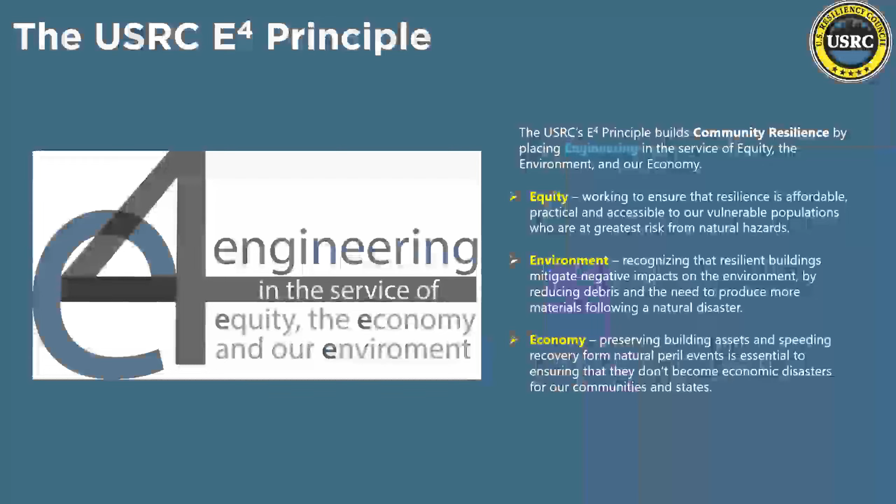Earthquakes have a big impact on society, the economy, and the environment. The Christchurch earthquake, which was 10 years ago, is nevertheless a fairly recent example of just how dramatic those impacts can be. There was a big earthquake in Christchurch, New Zealand at the end of 2010 and beginning of 2011. There were two of them.

The good news is only 2 buildings in the downtown area collapsed, but more than half of them were ultimately demolished because they were damaged. That raised a lot of questions about whether, from a code perspective, only having 2 buildings collapse in what was the big one for them was a very positive thing. But from the perspective of all the owners that lost their buildings, or tenants, or workers that lost their jobs and housing, obviously it was a disaster.

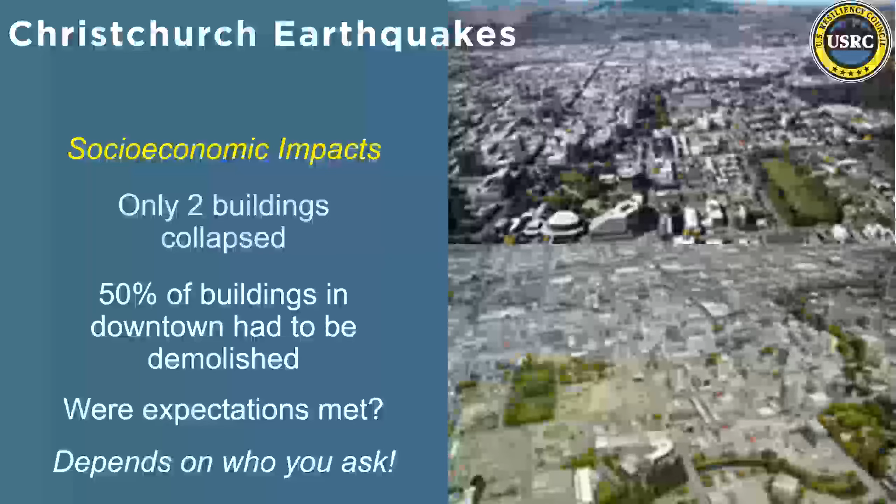Part of the formation of the USRC was to better align the expectations of the population with the design that engineers and architects perform. But it also had a really huge environmental impact.

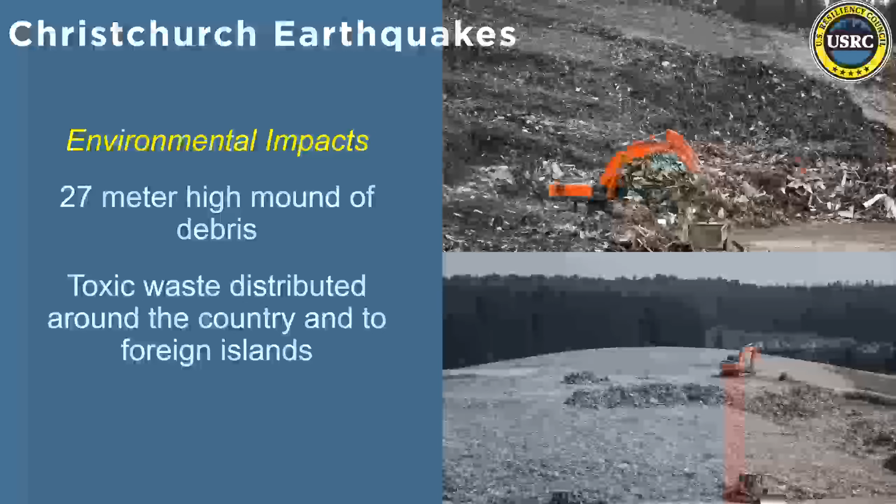We think about deconstruction of buildings at the end of their lifetime, but when you have a big earthquake like this, you don't have that luxury. The buildings get demolished and hauled off to landfills. There was a 27-meter tall mound of debris generated from this earthquake, and that doesn't even include all the stuff hauled off to other islands. A lot of this includes toxic chemicals, asbestos, lead, that they just didn't have time to take out. So building resiliently is also building in an environmentally conscientious way, because you don't have to replace the buildings as often.

Equity, the economy, and our environment. I'm going to save the environment for last because that's going to kind of go into what Brandon's going to be talking about. But when it comes to equity, the idea behind building ratings is that you can look at a whole community.

You can look at a whole community and how different buildings, different services like housing and food, are going to perform in an earthquake. You can measure that using a rating system like ours. But then you can start into urban planning and start deciding, okay, should we have requirements to retrofit older buildings? If we replace buildings over time, should they be replaced, once we have the opportunity, with higher performing buildings?

From a community perspective, I know the architectural profession has always had a really strong interest beyond just the bounds of the building itself. They've really tried to look beyond to what kind of impacts their designs are having on neighborhoods and communities. From the perspective of the U.S. Resiliency Council, we see this as an opportunity for design professionals when working with building owners or jurisdictions to say, hey, if we went a little bit further and designed these buildings not just to be safe like the current code requires, but also to be functional after an earthquake—if it's a grocery store or housing—how much better would that be for the community?

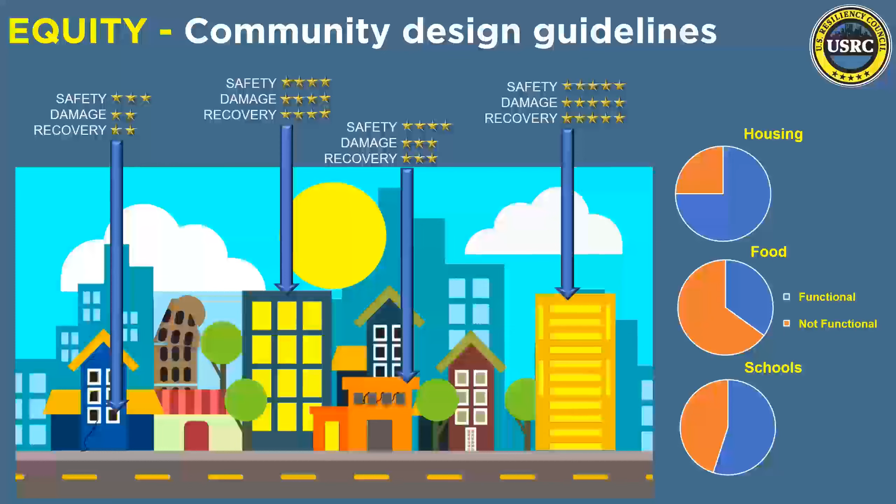So we believe that can really target especially areas that are disadvantaged or socially vulnerable. When it comes to the economy, you all know from professional experience that with the advent of the LEED system and other green rating systems, building owners have something that's more desirable. They can charge more money, it's a more desirable building space, the building's worth more. So we've seen a lot of evolution from older buildings being either converted to be more LEED or environmentally friendly, or new designs.

But we haven't really seen that in resilient design. In Tokyo, the premium for building value comes when they are demolished or retrofitted to have really high performing seismic systems like base isolation, since Japan has so many earthquakes.

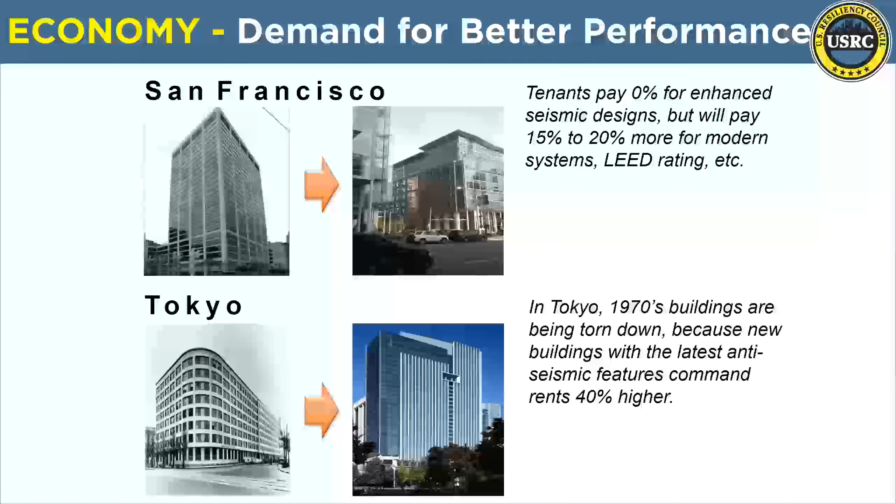Part of our mission is to demonstrate that it can be good for business to build buildings to higher levels of natural disaster performance, and that it can be a supplement to the value you get from designing green. So with that, I'm going to jump into a project that we recently completed. We're very excited about it because, again, it intersects with all three of those elements: environment, equity, and the economy.

That project was to look at a multi-story apartment building, a standard 4-story multifamily apartment building built to current code, ASCE 7-16, but constructed of 4 different types of materials: one with insulated concrete forms, one with traditional stick framing, another with CLT walls and floors, and one with hot rolled steel, structural steel framing. We looked at these buildings if they were located in Los Angeles, Seattle, and Memphis to compare different construction costs and performance levels based on the seismicity.

We estimated construction costs and the performance of these buildings in earthquakes that could occur in these 3 areas. The goal was to look at 4 buildings that all met the code. They should all be safe. People should be able to get out of these buildings without an issue in a large earthquake, but the performance, nevertheless, might be different. That's what we wanted to look at.

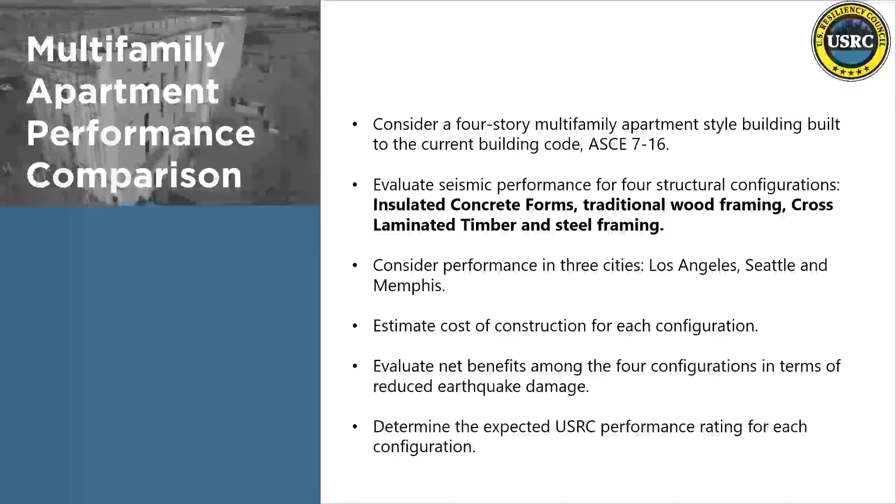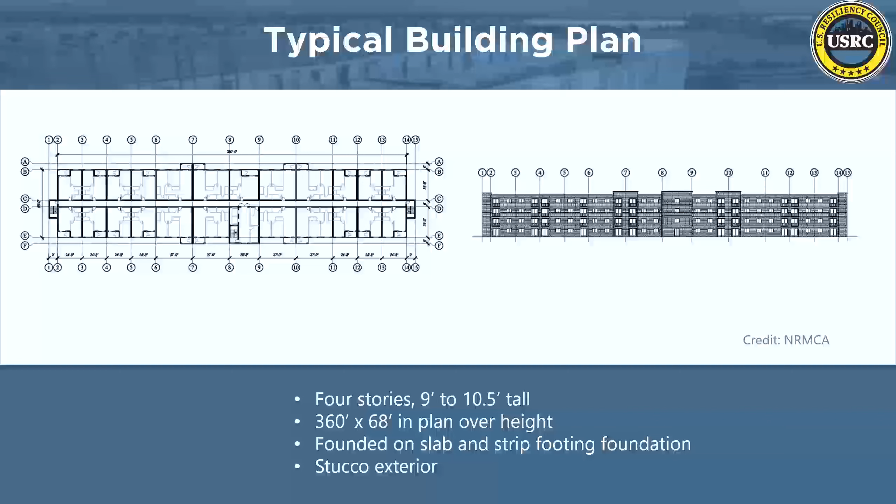So again, a very ordinary style building, double loaded corridor, 4 stories, stucco exterior, nothing particularly special, a combination of 1 and 2 story, 1 and 2 bedroom apartments. We looked at the details of construction for each building type, whether it be traditional wood framing with joists and plywood shear walls, steel frames, insulated concrete forms with precast concrete floor planks, and ICF exterior and interior bearing walls.

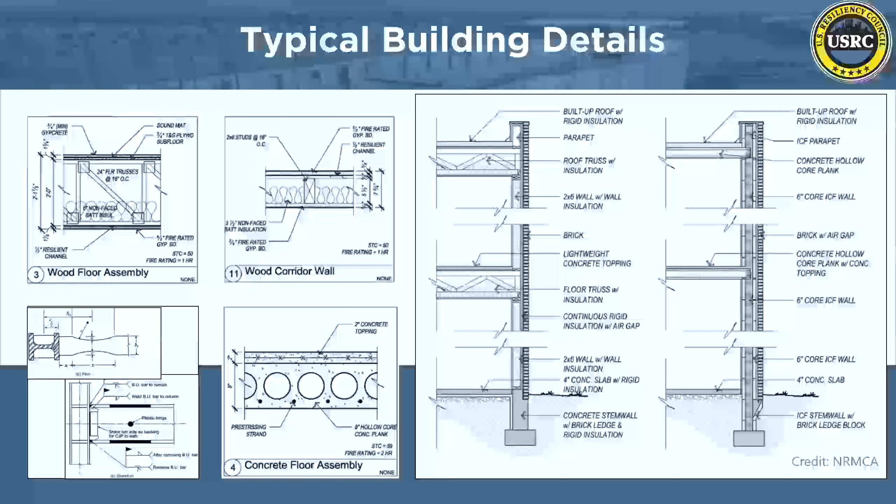All founded actually on - this is an error. It wasn't with a brick exterior, it was the stucco exterior. So I apologize for that slide. But basically, we developed cost estimates from each of these building types, and then the performance characteristics we measured using engineering analysis.

One of the things we found almost immediately was that the cost comparison for these buildings was generally pretty close. There wasn't a great deal of cost differential between the different building types, whether it be ICF, wood, the 2 different wood types, or steel framing. What we did notice, however, especially from the start of the pandemic until today, was a lot more variability in some materials. There's a lot of variability in wood pricing, and very little variability over time, in particular in concrete pricing.

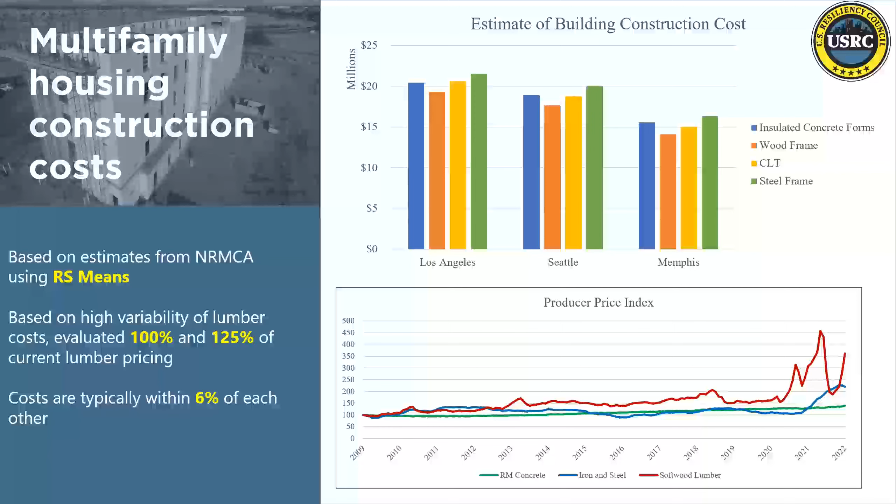So while these buildings are generally fairly price neutral within a few percent, in the middle of 2021, for example, wood was much more expensive than it is even right now. And so that pricing would go up. So from a purely cost perspective, there wasn't a lot of difference in the construction.

But in the performance arena, there was quite a bit of difference. I'm showing you 2 graphs here, and it's simple to look at the 3 different material types - ICF, and then we combined the wood types and steel. The first graph on top is a measure of the strength of the building. The stronger a building is, the more capable it is of resisting earthquakes. Again, all 4 of these buildings conform to the code.

So it isn't that one wouldn't pass a building department - they're all code compliant. But you can see that the ICF building, the concrete building, is considerably stronger than an equivalent wood or steel building built to the basic requirements of the code. That's simply because pound for pound, concrete is stronger than wood or steel. From a construction perspective, you're going to build the entire exterior of the same material. You're not going to just have little pieces of a concrete wall and then put wood in between. So you just get more strength naturally as a choice of material.

On the bottom is a measure of how stiff the building is - this is looking vertically over the height of the building from the ground to the roof. In a standard code level earthquake, the buildings are going to move back and forth. The roof is going to move more than the second floor.

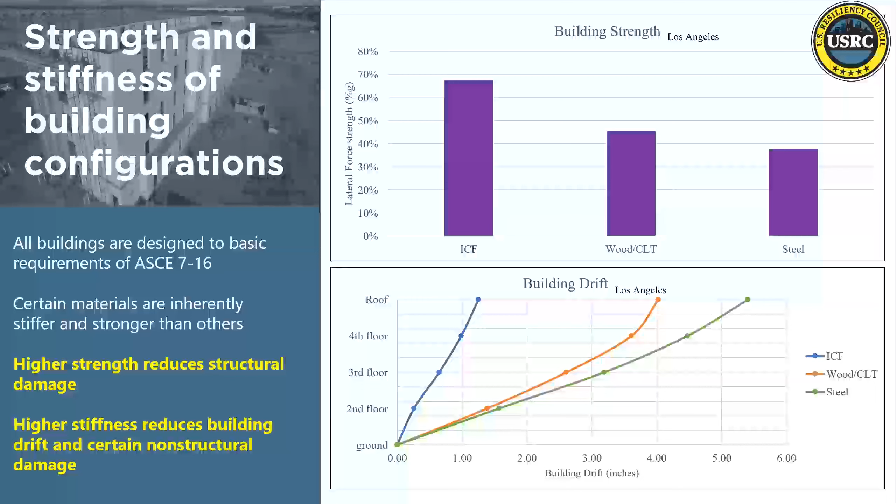So for buildings that all meet the code, those made of the stiffer, stronger materials are demonstrably quite different than the others. And this impacts, as I said, the damage and the recovery time.

So here are the 3 cities that we looked at: LA, Seattle, and Memphis, and the 4 different building types: ICF, traditional wood frame, CLT, and steel frame. The top graph looks at the property repair costs in a code level earthquake. These repair costs are a percentage of the replacement cost.

So what that means is that in the code-level earthquake in Los Angeles, the ICF building suffered damage about equal to 3% of its replacement cost. That's the blue bar in Los Angeles there on the top graph. Whereas a wood building suffered about 9% of its replacement cost.

And then the bottom graph looks at how long it would typically take to repair this damage in a way that would allow you to get back into the apartment building and use it as a habitation. Doesn't necessarily mean it's going to be completely repaired, but it'll be habitable. And here there's just a dramatic difference.

You can see that the time it takes for reoccupancy in the stiffer concrete building, where the non-structural elements are less damaged, is really just probably a couple of days. It's probably just the inspection time.

But for a very flexible wood building where you have lots of partition damage, ceiling damage, cladding damage, fenestration damage, now you're talking almost 6 months or almost 9 months of time, and that includes all the time for repairs, but also getting building permits, finding contractors. All of that is going to take a lot of time.

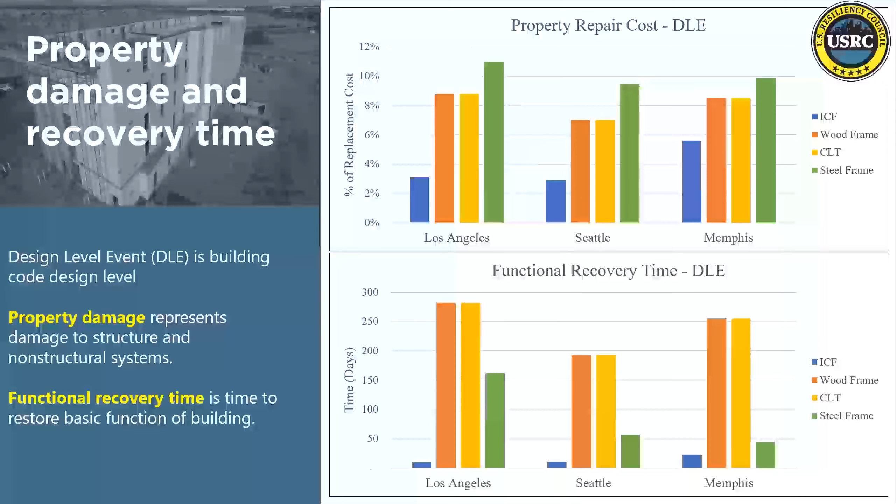And you can see for steel, it's sort of in between, but really it's a dramatic difference between if you have a stiff system that just isn't going to cause all of the non-structural elements to be damaged — you're going to save a lot in repair costs and recovery time. And that translates into dollars, of course.

So what I've done here is we've taken the average rental cost of 1 and 2 bedroom apartments in different cities — LA, Seattle, and Memphis. And we've said, well, given how long the building will be out of operation for repairs, what's the lost rental revenue that the owner might receive? And we've added that to the cost, the physical damage cost.

And so each bar now you can see has property losses and rental losses combined. And again, these are in millions of dollars. Again, the cost to build the buildings wasn't that substantially different, because, as a graph I showed previously, but the damage costs are dramatic.

You're seeing for CLT, traditional wood framing, costs on the order of $4.5 million in a design-level earthquake for Los Angeles, and that's less than about $750,000 for a similar ICF building.

So when it comes to the economy, this is really a dramatic indication that you can have two buildings that'll both be safe, but if they're constructed of different materials, they can have a wide impact on the economic value.

And of course, what this doesn't include is the social impacts of having renters out of these buildings for many months, right? Depending on whether those are higher income or lower income renters, finding alternative space can be very difficult and have a much larger socioeconomic impact.

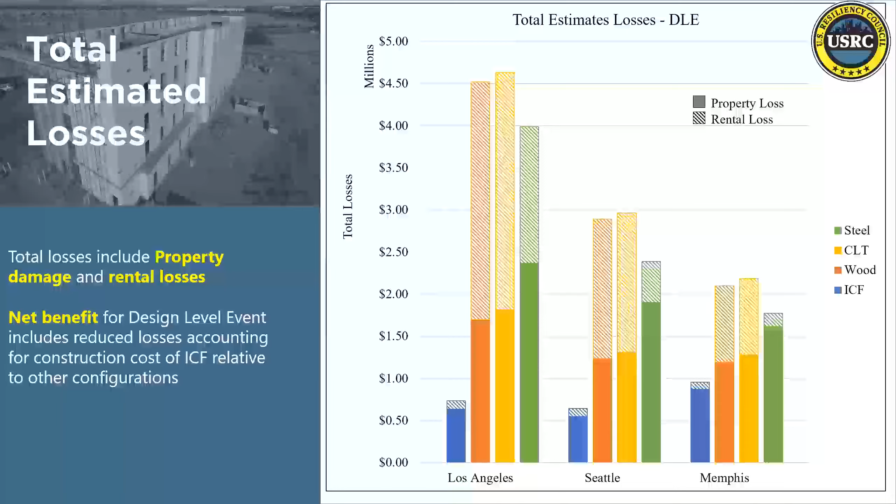And then, of course, again, we didn't look at this in particular, but the damage to the partitions — if the partitions all have to be taken out, or the cladding has to be removed and replaced, all that has to go somewhere. And in a large earthquake, when there's lots of buildings in an area damaged, it's not going to be recycled. It's going to be thrown into a landfill. So there's an environmental impact that this has as well.

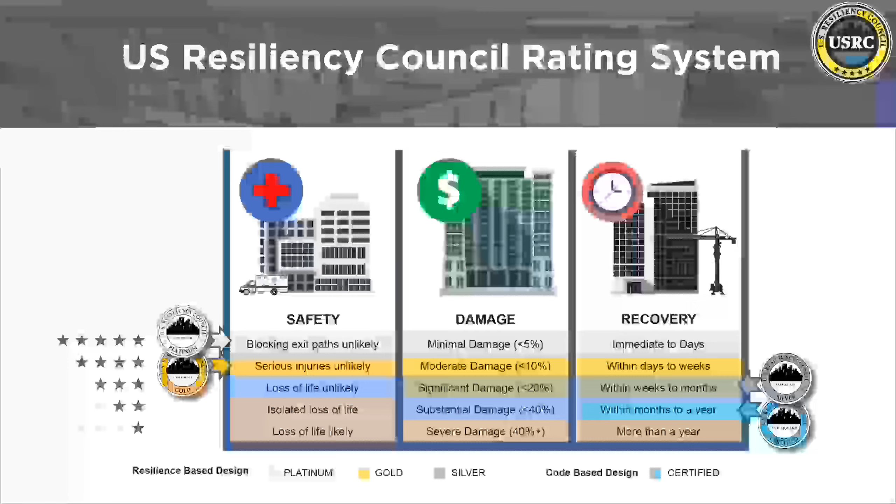So the USRC rating system — we compared each of these buildings under the USRC rating system. The USRC rating system is focused on three different dimensions: safety, damage, which is the repair cost, and how long it takes to get back in the building. And, similar to LEED, you have different badges that you can get based on the level of performance. So we compared these different building types to how they might achieve a USRC rating.

People can get out of the buildings. There's going to be minimal injuries. From the damage perspective, this is just the repair cost. You saw how good the repair costs were for ICF.

They're still reasonably good, though, for wood and CLT. But it's when you get to recovery time that you really start to see the difference between the ICF, the concrete performance, and the wood performance. Whereas an ICF building might be able to get a USRC gold or platinum rating, think of LEED, because of that extended recovery time, the wood buildings would really not perform well.

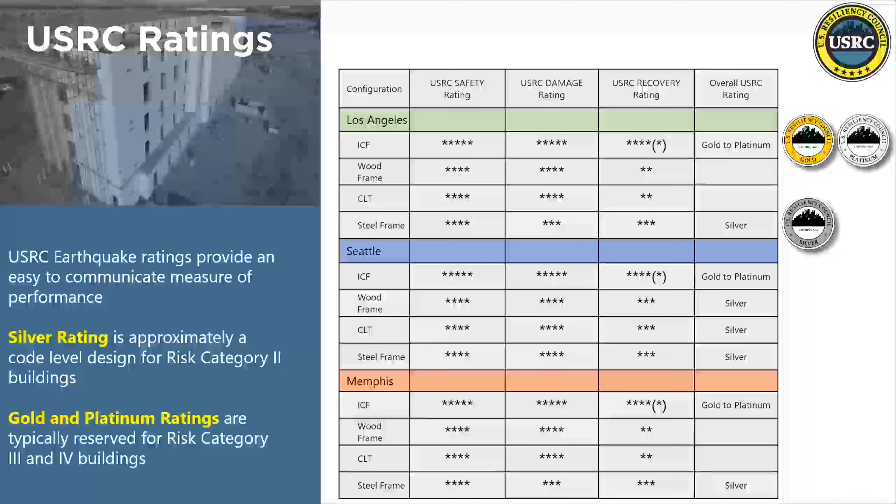Being down for 9 months is a real hardship, both for the owner and the tenants. So again, 4 buildings built to the code. The code is a life safety document. They all perform well relative to life safety, but the key difference is in the damage costs and the recovery time.

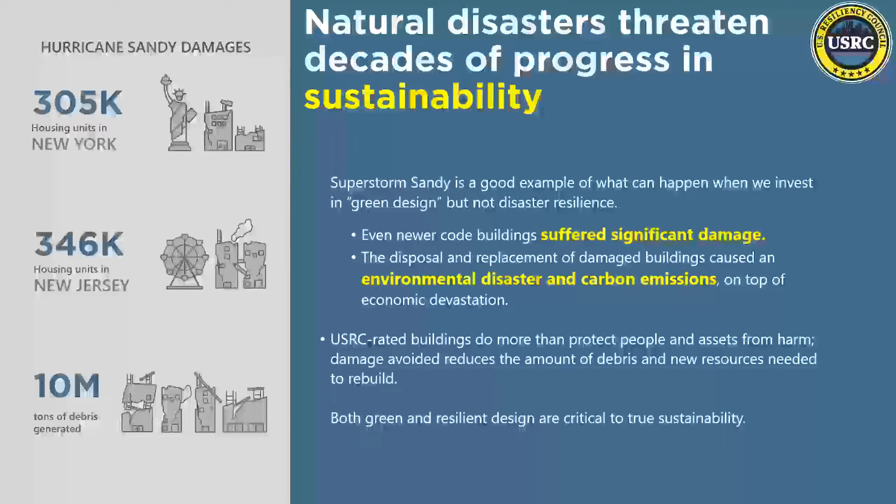And so, of course, we really can't get to this definition of sustainability without looking at both. So I'm going to leave this to Brandon in a minute, but I just wanted to say that in addition to measuring those 3 dimensions of safety and damage and recovery time, structural engineers are also working to look at how different buildings contribute to carbon impacts at their end of life.

You probably have a very good feeling for the embodied carbon of many construction materials. And I know that the engineering community is looking to sort of even improve further our ability to measure performance by including that sort of fourth dimension of environmental impacts.

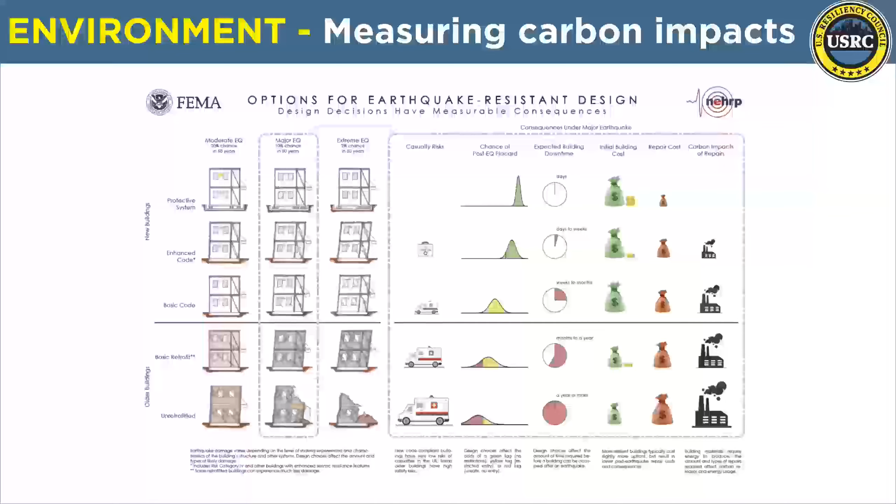And so, when it comes to construction materials, the big term now is ESG, right? Environment, sustainability, governance. We kind of use the three E's: equity, environment, economy, kind of similar. Adding in resilience to that, ESG plus R is becoming popular now.

And it's about looking at a building over its entire life cycle, right? Construction costs for a resilient building versus a non-resilient building might be slightly more in some cases, not always. But over the life of a building, whether it's an earthquake or a hurricane or a flood, it can be the difference between, in small events, a building riding through that completely and not suffering any loss of building operations or damage, versus one that is safe, but can't be reoccupied.

It'll go through potentially a large impact in its lifetime where a resilient building might have to close for a while, but it'll still be repairable. So the owner won't lose their business or their asset. Whereas non-resilient design buildings, they could actually collapse or injure or kill people.

And then when we get to the end of life, it's how you choose the end of life for a building. Do you get to deconstruct and recycle a building on your own terms? Or do you have to do it in a haphazard manner because of a large natural disaster that just destroys the building? So the choice of building material really impacts all these elements of ESG and R, beyond just that first cost.

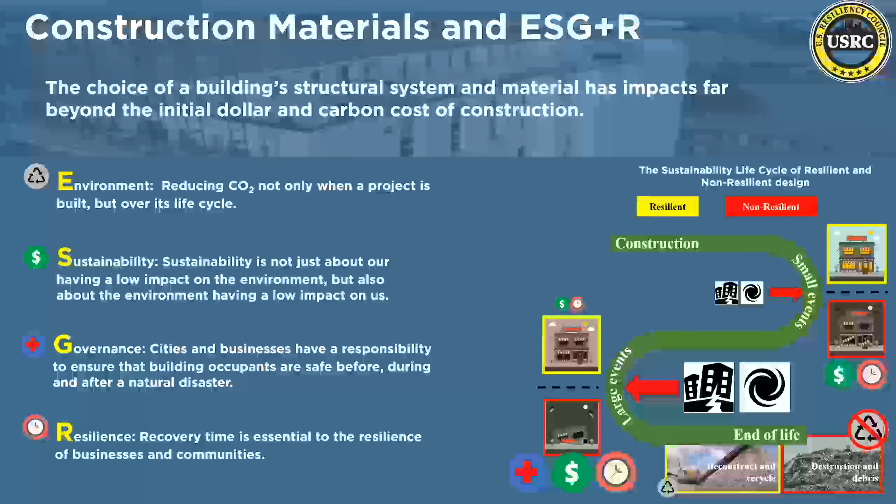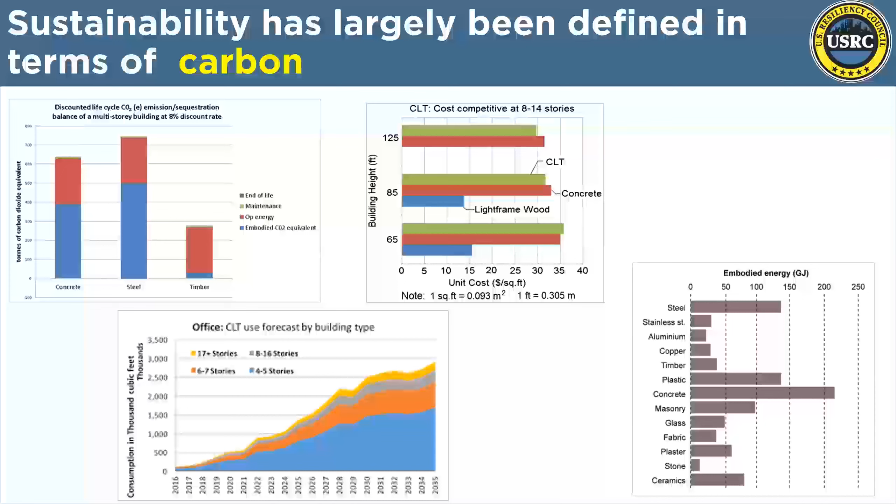So finally, just to say that the term sustainability that we've been using since the early 2000s has really focused around this idea of carbon, and there's been a lot of studies on which buildings and materials contribute more carbon to the environment. That's been a huge amount of focus, but it's been the USRC's goal to look at both green and resilient design as two parts of sustainability. You can think of green design as where we have a low impact on the environment, and resilient design as where the environment has a low impact on us.

In the slides I've shown you, you've seen that you really can't have true sustainability without having both. So it's our mission to work with engineers, but also with architects, because you're obviously the first line typically when it comes to getting engaged with clients and owners.

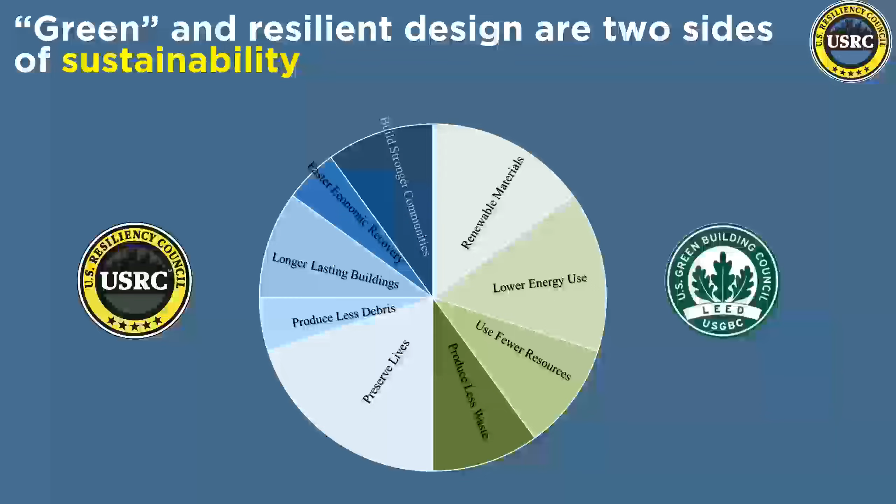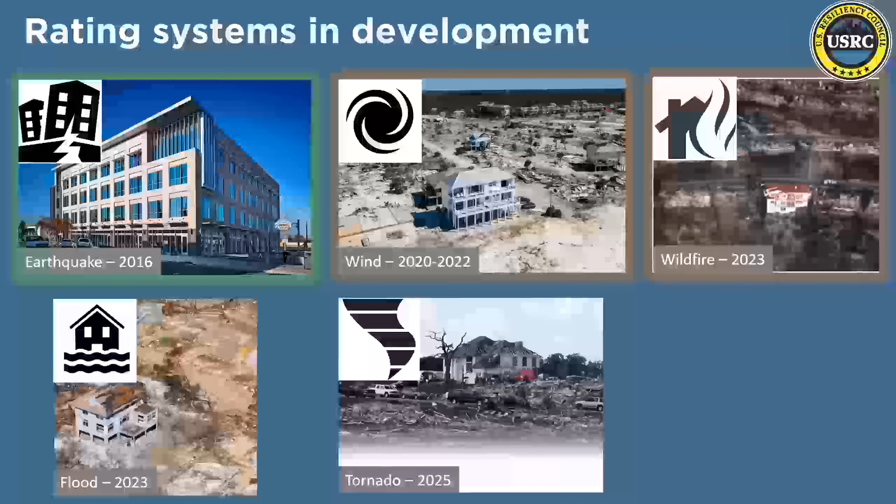In making that case early on that buildings should be built both green and resilient, we're working on other rating systems. As I mentioned, we have our earthquake rating system. Our wind rating system will be out at the end of this year, and we're very excited about that. Then we'll be working on flood and wildfire, and likely tornado after that. So our goal is really to expand beyond the geologic hazard of earthquake into the climate-related hazards, which are the focus of so much attention right now, and a lot of funding too, and interest from stakeholders, lenders, and insurance companies.

So with that is my part of the presentation. I know again we've been working with AIA California on our policy initiative, and I've spoken to you all before, so you're free to reach out to me. We would love to have architectural involvement in the work we do, particularly as we start developing our flood and wildfire rating systems. The resilience components of those are much more architectural than they are structural, and involve landscaping and all of that.

So as we start to roll out development of those, we're going to be going to you to ask for your help serving on committees and being part of what we do. But most importantly, when you talk to clients about building design and the value of resilience, I hope you'll use this as a resource and consider recommending to your clients that they design their buildings to be resilient.

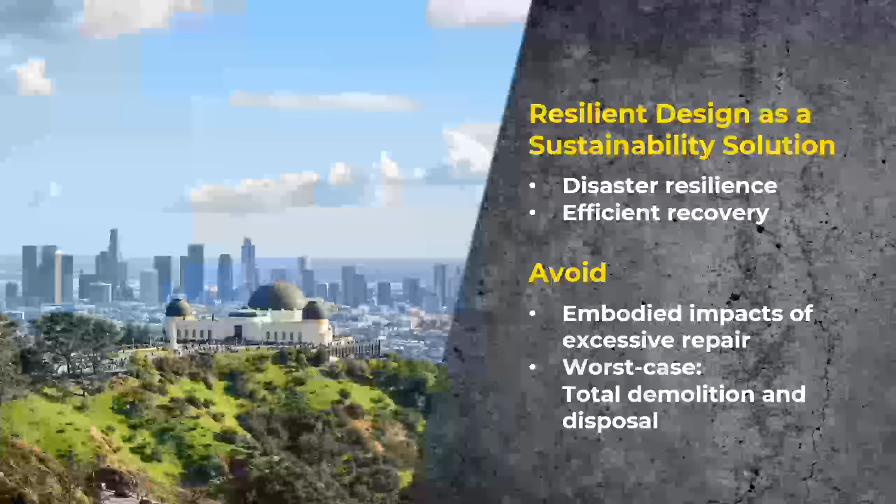And these changes in concentration of population and property values are significant contributors to the increased human and property loss potential, so those economical and social impacts, but they also can be correlated to significant sustainability impacts as well when you talk about significantly dense populations and built environments in a high risk area.

So how do we quantify sustainability impacts? We do this via life cycle assessment. Previously, if you sat in on some of our previous presentations, we did a presentation for California on life cycle assessment of concrete buildings, and that's available on their website if you want to take a look. It's a very broad topic with a lot of variables, so I'll just do a quick intro here.

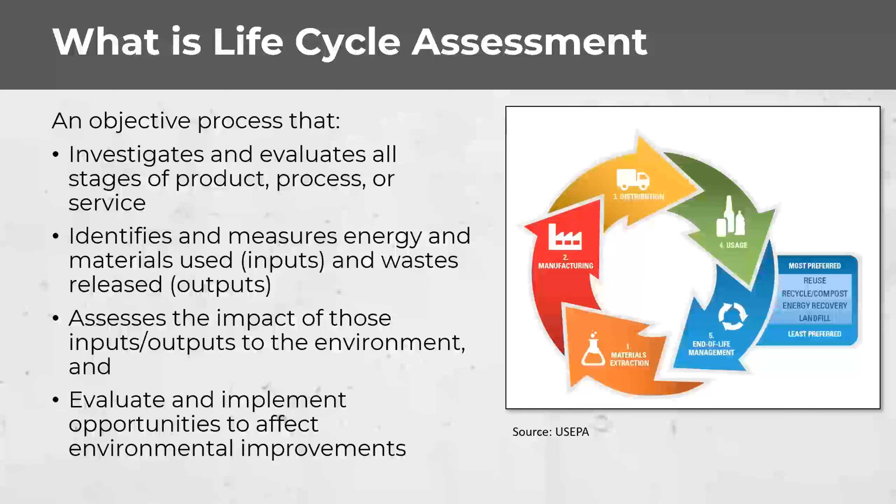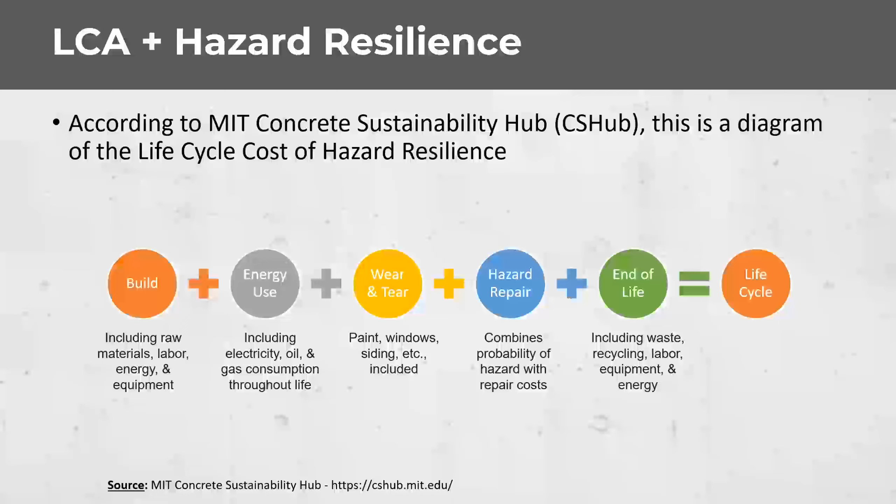Minimizing repair need will directly reduce the supplemental carbon emissions needed to bring the building back into service. As a worst case scenario, should the structure not be resilient enough, resulting in damages that exceed the acceptable cost of repair, the structure will be demolished and disposed of. This process has potentially significant carbon impacts, but more importantly, the replacement of the structure will yield a duplicating effort, where the product and construction stages' emissions will essentially be necessary to occur again. So the most sustainable structure at the end of the day is the one you don't have to build twice, but build once.

As Evan touched on with the Christchurch earthquake, upwards of 50% of the downtown structures had to be demolished, which ultimately resulted in new carbon emissions through disposal and replacement construction.

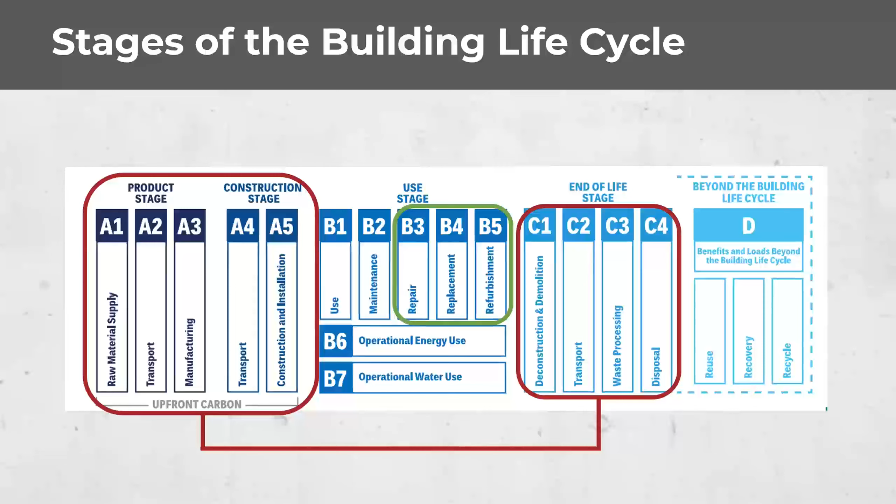So now, what might the magnitude of those carbon impacts look like? This is a very difficult topic to really slice and dice when it comes down to types of repair materials and magnitude of repairs. But as an example from the USRC study for the Los Angeles area, percent impact can be extrapolated for different structure types based upon cost of construction compared to property lost. The resulting impacts range from approximately 3% to 11% among the structure types, using that as a figure of comparability in terms of percent impact.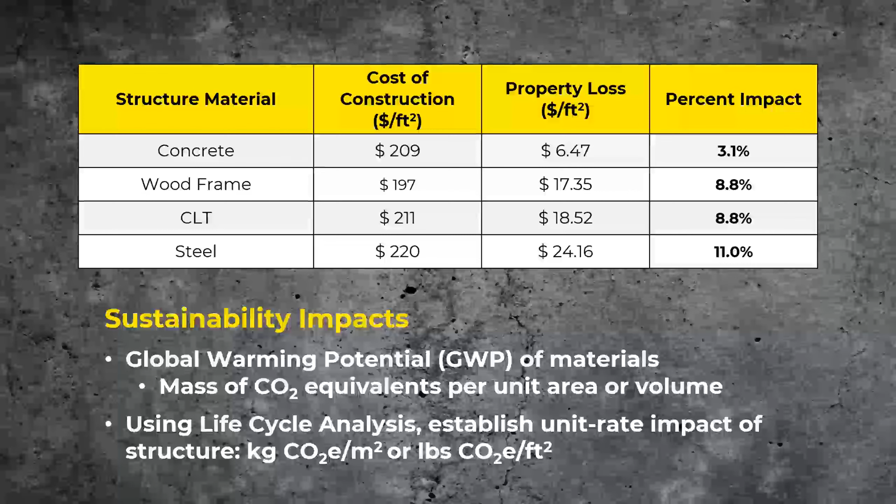When it comes to sustainability, the primary metric is known as global warming potential, or GWP. This figure is reported as a mass of CO2 equivalents per unit area or volume. Using the life cycle analysis I previously mentioned, a project can have its unit rate carbon emissions quantified. Then purely for estimation purposes, we can lever the anticipated percent impact against this to get a general understanding of what the sustainability impacts might be due to an event in the repair and/or disposal.

A brief example I'll share today comes from an MIT life cycle assessment study on a 12-story commercial structure. The study looked at a 60-year service life of a building when comparing steel and concrete structural systems, examining embodied carbon pre-use and operational carbon, or use phase carbon. This took place in two different climates to understand the variations of environmental conditions on operational energy, where concrete's thermal mass and improved insulation properties improve the operational efficiency.

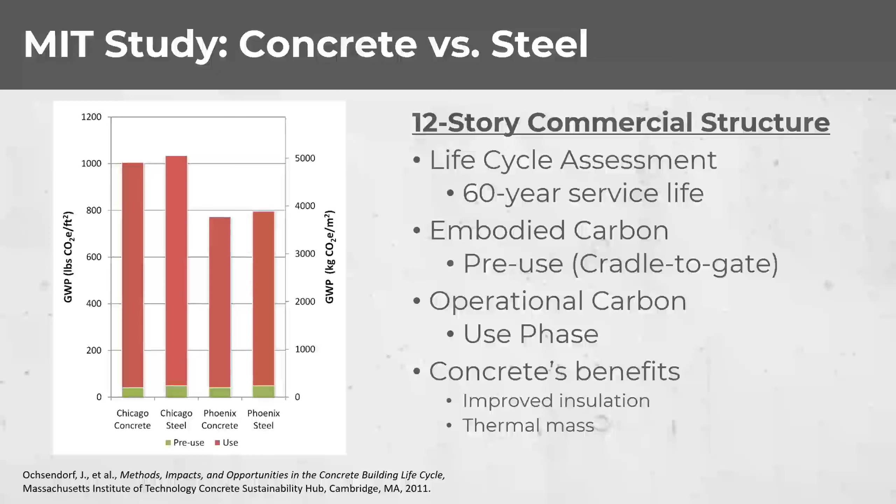This also aligns with studies via AIA California, or AIA 2030, where they look at embodied carbon aspects and operational carbon aspects. But zooming in and focusing on the initial embodied impacts of structural materials, the study found that concrete buildings had a cradle to gate impact of approximately 193 kilograms of CO2 equivalents per square meter, while the steel building was approximately 232 kilograms of CO2 equivalents per square meter.

Extrapolating from our previous study and applying our impact percentage for damage sustained during a design level event, the embodied impacts of repairing the structures to a serviceable state would be approximately 6 kilograms of CO2 equivalents per square meter for the concrete structure, and 25.5 kilograms of CO2 equivalents per square meter for the steel structure. So resilient design directly impacts the end embodied results of these repairs when they're ultimately put into effect.

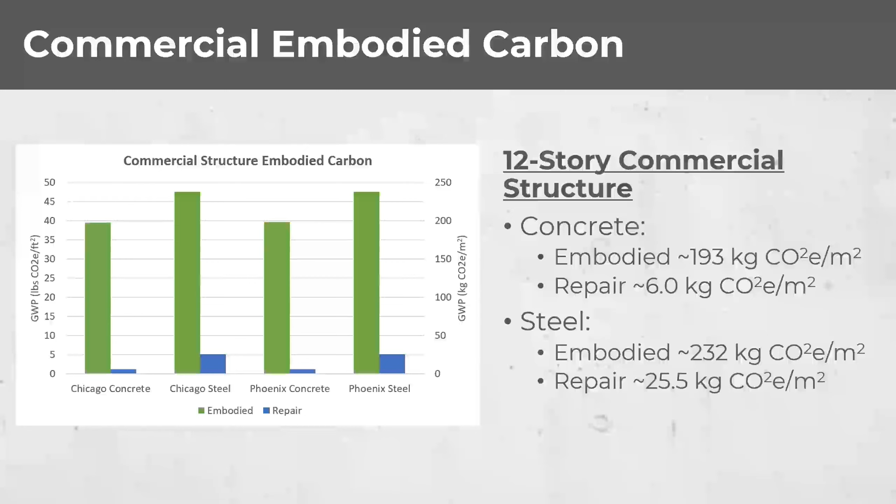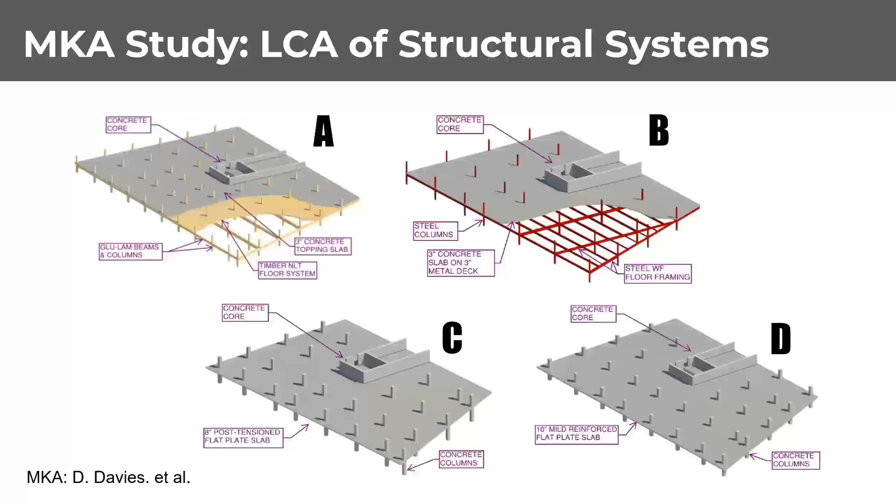Another brief example we can review and pull data from is a life cycle analysis study performed by MKA structural engineers, where they compared structural systems comprising of glulam timber, steel frame, post-tension concrete, and mild reinforced concrete. Visual representations of these systems you can see here on your screen. This was also in our previous LCA study, with a more in-depth review of the study itself, so review that when you get a chance.

Their study did look at and compare the cradle to gate and cradle to grave impacts of the different systems over a 60-year life. Cradle to gate is the initial upfront product emissions, and cradle to grave is over the entire service life of the building, not so much from the operational energy, which is excluded from this, but from the use of the materials, repair of the materials, and disposal of the materials. The ultimate conclusion from the study was that of all four systems, the embodied carbon and overall sustainability impacts were relatively similar, ranging from approximately 180 to 195 kilograms of CO2 equivalents per square meter.

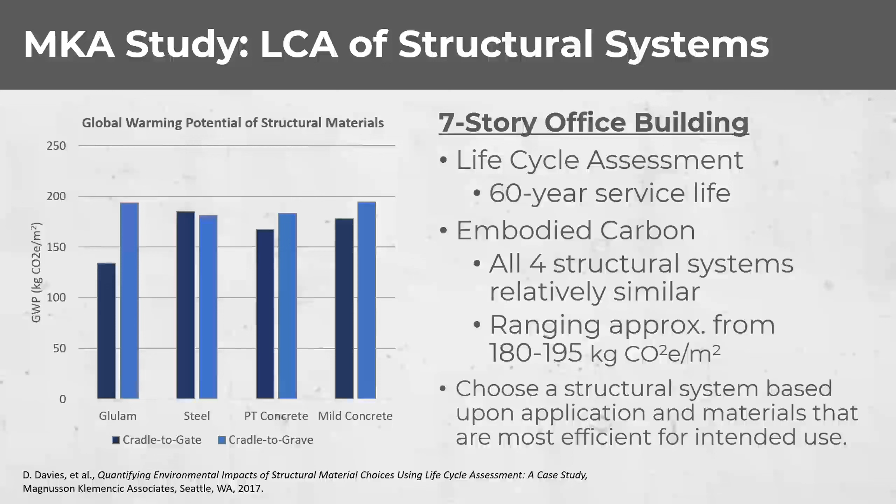As such, choosing a structural system should be based upon application and materials that are most efficient for the intended building use.

In an effort to apply perspective to the impacts of damage sustained during a design level event, we can apply our impact percentage against the carbon impact. In doing so, we can find a theorized sustainability impact in kilograms of CO2 equivalents per square meter of 11.8 for glulam, 20.3 for steel, and approximately 5.2 to 5.5 kilograms for the concrete structures that were studied.

Relatively speaking, these values for repair don't necessarily seem astronomical, but circling back to our review of the Los Angeles area, which comprises nearly $1.9 trillion of property value, you can see that the potential for impacts to ultimately compound significantly. This is particularly true due to the fact that when an earthquake occurs, and not if, it has the potential to impact a significant and broad area where no structure can avoid the event. As such, applying resilient design considerations to your projects can not only mitigate the social and economical impacts, but also significantly benefit the sustainability impacts as well.

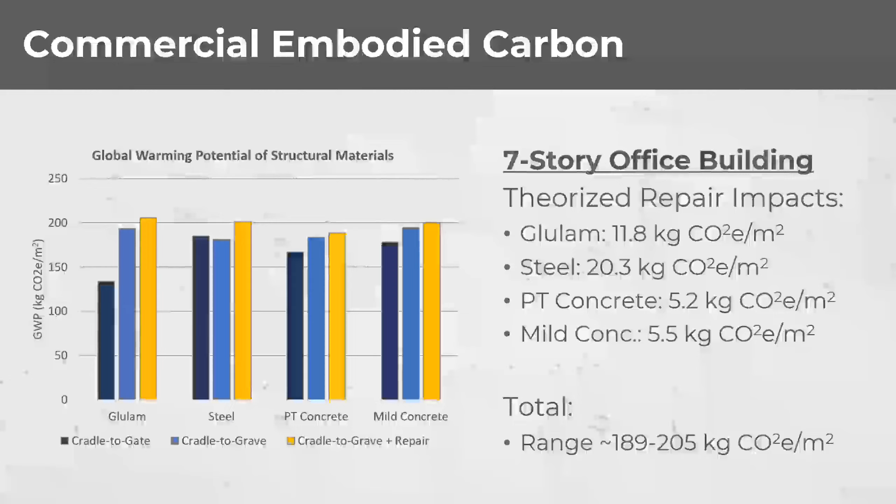In the end, no community can ever be completely safe from all hazards. Generally, it would be uneconomical to design commercial or residential buildings just to survive a direct blow from a tornado with 300-mile-per-hour winds or a magnitude 9.0 earthquake. But resilience does promote greater emphasis on what communities can do for themselves before a disaster hits, and how to strengthen their local capacities rather than be dependent on reactive strategies post-event. Ultimately, disasters are inevitable, but their consequences don't necessarily need to be.